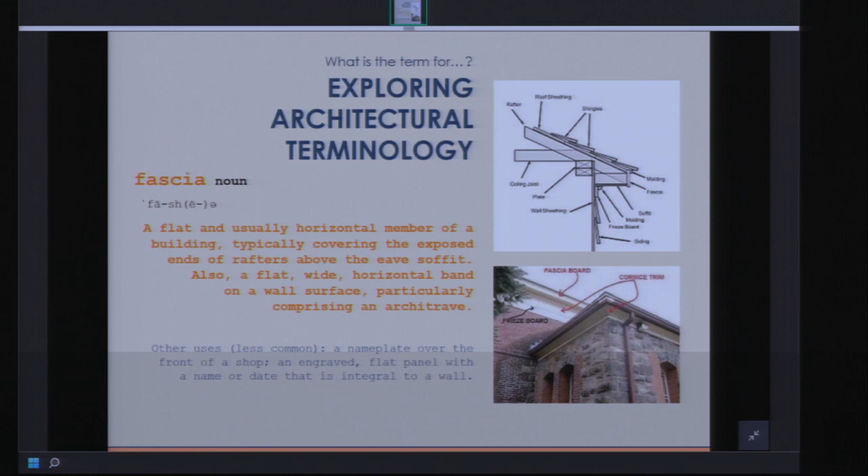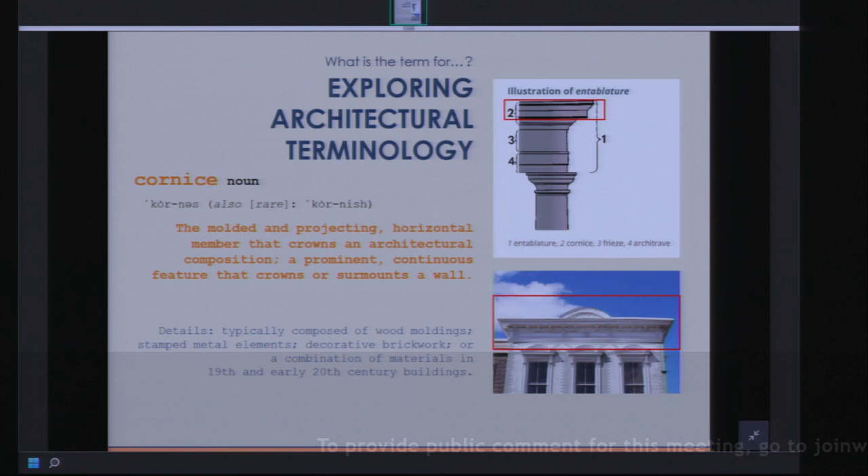Entablature, for those of you who are jumping ahead, is an element found in classical architecture. It's the entire band of horizontal elements above the column capitals or an engaged pilaster. Most frequently we see this in classical architecture, and particularly in Illinois we see it in Greek Revival buildings. The broad, simple massing of an entablature was easy to recreate with the simple tools that traveled easily with pioneer carpenters.

Batter. A batter is the slight slope inward toward the top of a wall, pier, or column face. The slope may be a straight line or a concave curve. Most typically, many people are familiar with this as seeing battered columns or piers in craftsman-style architecture, but you also see battered walls in Egyptian Revival and Moorish architecture, and also as parts of ramparts. Think about prisons or sea fortresses.

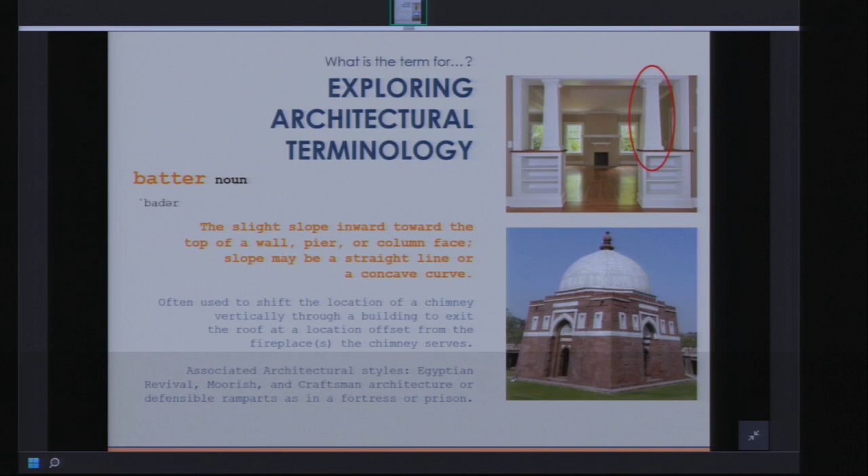Voussoir. A wedge-shaped or tapered stone or brick used to construct an arch. The central voussoir is called a keystone, placed last as a wedge to lock a true arch. Keystone voussoirs are oftentimes larger and sometimes project slightly from the face of the arch. When an arch is composed of brick in authentic historic architecture, the brick is called gauged brick because the brick is actually tapered. Oftentimes in a modern brick arch, masons will use the same size brick of regular dimensions, and they will increase the joint width to get the joint. But in a historic arch, the brick is actually tapered to create gauged brick and create individual voussoirs.

Cartouche. An ornate or ornamental frame, typically scroll-shaped, surrounding a tablet. It also refers to the convex, circular, or oval bas-relief decoration on a wall. It's often associated with classical and Georgian architecture. Its roots are from the Latin charta. Additionally, cartouche may include an inscription, a date, or a name in addition to any bas-relief sculpture. Sometimes you'll see a coat of arms engraved in them as well.

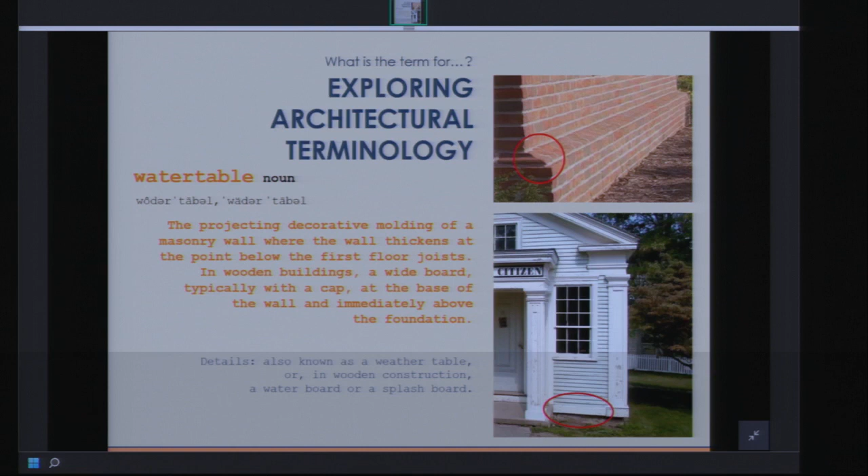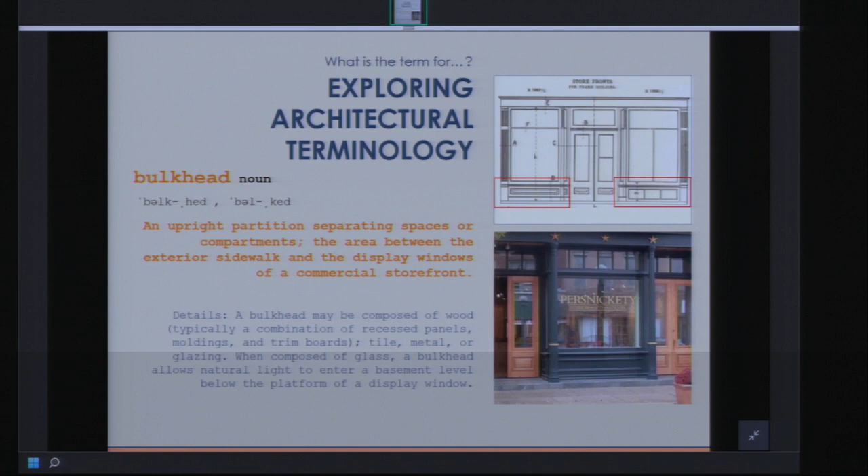Cheek wall. The side wall of an object. In architecture or landscape, it's the flanking walls of a staircase. They also are known as abutments or wing walls, and they can be of coursed stone, carved stone, or brick. Brick cheek walls are typically associated with craftsman bungalows where the walls may flare out and terminate with either a light fixture or a planter urn.

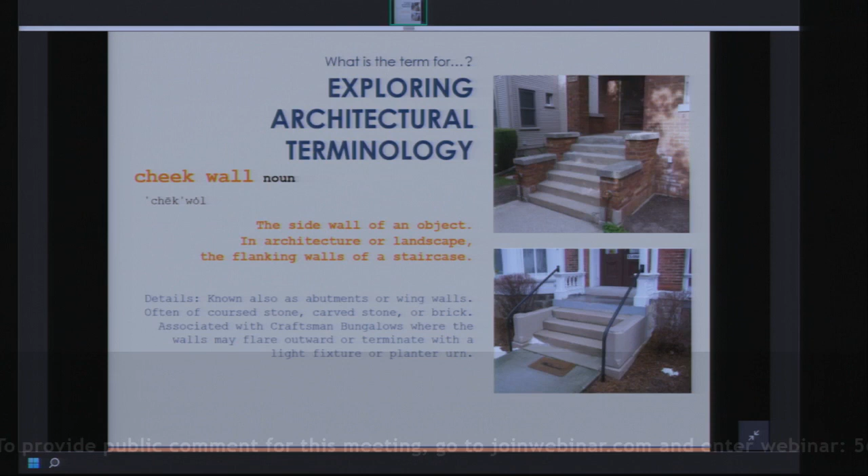Vitrolite is a proprietary term that has become associated with the material itself. It's pigmented structural glass used for a variety of applications, including commercial storefronts and bathrooms. It's associated with the Art Deco style.

It was originally marketed as Sani Onyx for use in commercial refrigeration units in the 1920s. Later, another product was introduced called Carrara glass, and then Vitrolite was introduced. In the mid-1930s, the Libbey-Owens-Ford Company sponsored an architectural competition to encourage architects to find creative ways to use Vitrolite in modernizing storefronts.

Today, Vitrolite and Carrara glass is highly prized in historic districts as a representation of the evolution of historic buildings. It can be salvaged by using hot wire to get behind the glass and cut it off of the mastic. It was introduced in 1900 by a company in Indianapolis, Indiana, and the last company producing this type of glass was in Germany, which ceased production in 2020.

In some restoration projects, they have found that back-painted glass creates almost the same appearance when trying to patch broken glass on a storefront that was finished in Vitrolite.

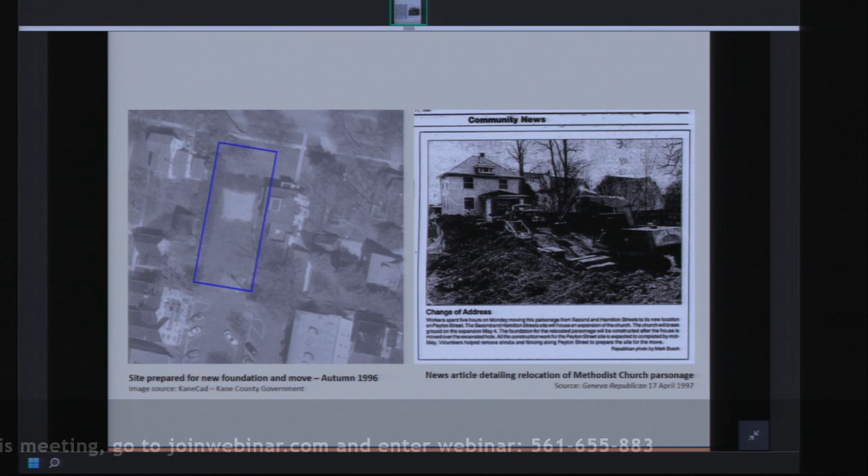Also, there's a newspaper article from April of 1997 discussing and identifying that the building had been moved. So we do have good verification of the building being moved in the spring of 1997.

I want to correct the staff report right off the get-go. In the staff report, I mentioned that the garage was historic, and I was in error. I am thankful that Sean Gallagher, the architect for the project, submitted these images to verify that the garage is a modern construction. I confused this with another nearby property, so I apologize to the commission and the applicants.

So just to run through the images available to look at, before I turn the podium over to the applicants, this is the proposed site plan. As usual, I have tried to identify the various parts of the project by different colors.

The blue section is the original house. The green section above is the historic open porch. The yellow area is the proposed additions, and the pink area is a proposed deck at the rear.

The reason this application is coming before you is that only a small portion of the addition is visible to the public right-of-way, and that's primarily the garage. The rest of the building addition has been tucked behind the original house with the use of offsets so that it does not meet our requirement for review, and the roof line has been held equal or below the existing ridge.

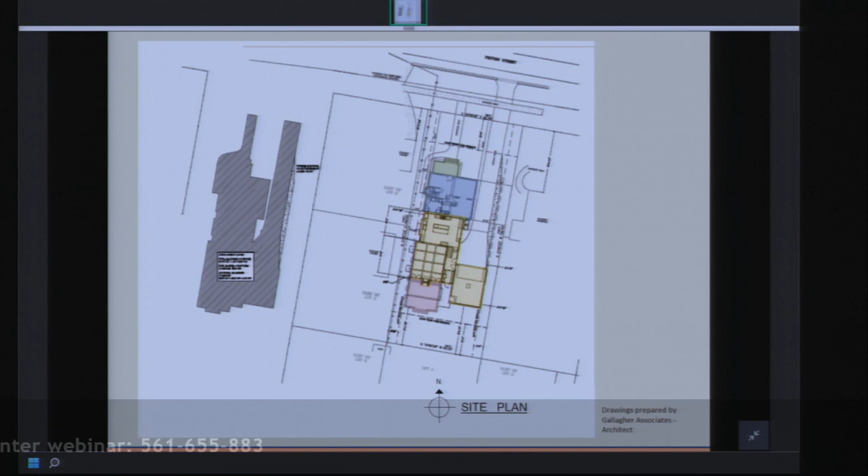Elevations have been provided by the applicant. I'll let them tell you in more detail. Again, they're available for your viewing and questions.

Again, to give you an idea of what's being proposed, the green is the porch, which faces Peyton Street to the north. The blue is the original 1906 house. The orange areas, which appear kind of pinkish on the screen, are the areas being proposed for demolition at this point.

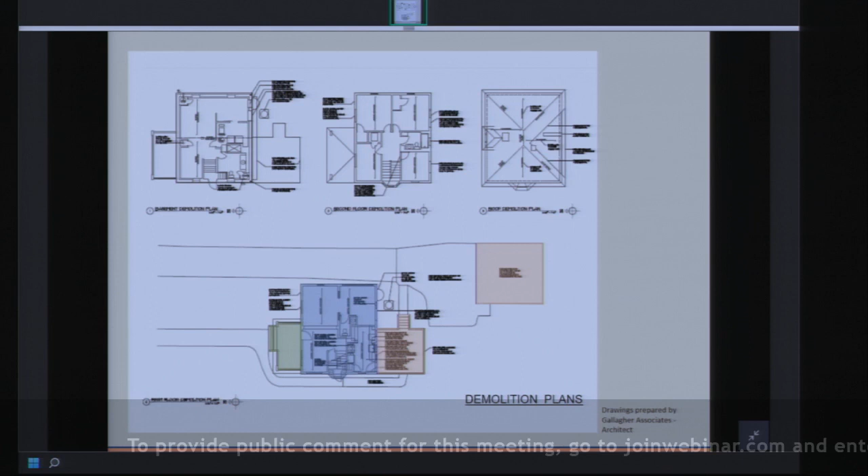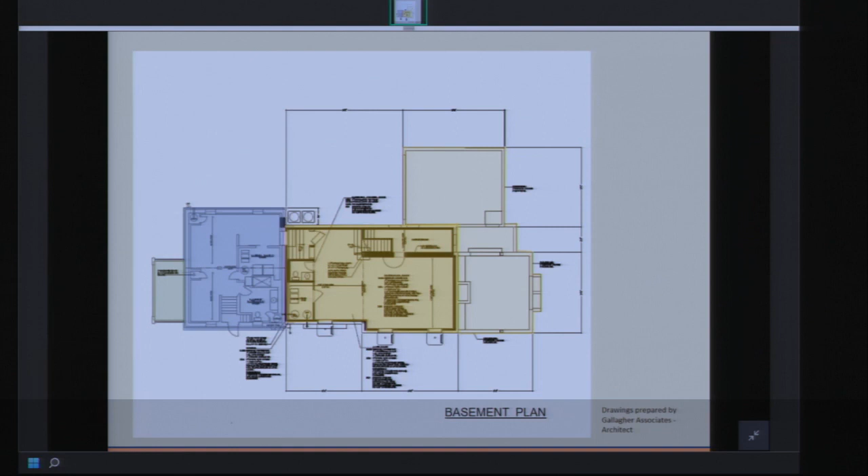At this point, I would turn the podium over to Matt Mayer and his wife Shannon, and they can begin the presentation, then Sean Gallagher, architect, will join them. And I can get you to any slide you want to get to.

Does this need to be turned on? Is it already on? I think it's on. Okay, thank you. You might have to raise it.

Well, thank you for the overview. Thank you very much for your attendance this evening and giving us this opportunity to present our project to you. Also, thank you for your service and being part of this commission. But even greater than that, thank you for the hospitality, and thank you for welcoming us into the community. We haven't been in Geneva for a long time. We just moved in July. And I think we've definitely felt like this is a great community, and we've been welcomed in by new friends and new family that we consider to be part of our own.

And we think that this project is really going to plant some roots for us and for our family. We have 3 children at home, and that's a big part about the project, is just to be able to grow with the house and be able to have our kids grow with the home as well.

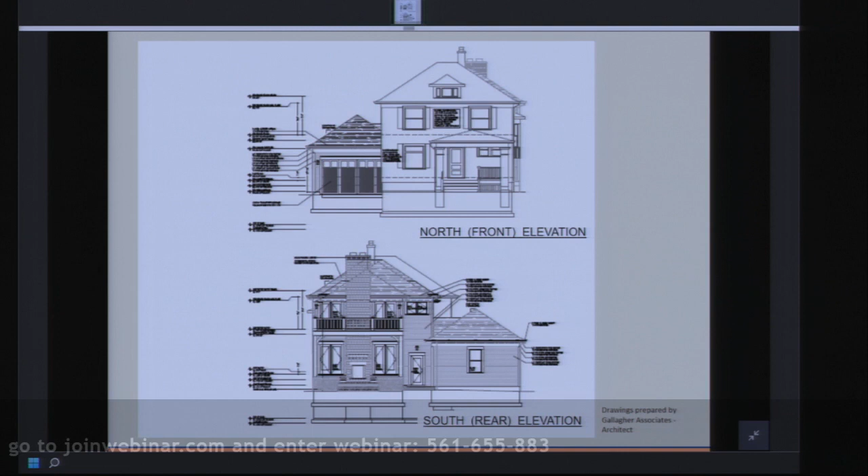As far as siding material, we'll be using smooth LP. Depending on the lap, right now it matches the existing aluminum siding, but we'll see what we have underneath—it'll be exciting.

Question: the exterior siding on the garage in question is going to coordinate with whatever's happening on the house? Exactly—and all of the new addition.

So if the building itself is aluminum sided and who knows what's underneath, when you say the siding on the addition and garage will match what's on the original house, you don't mean you're going to put aluminum siding on that? No, ma'am—that's what's on the original house now, but I do not mean that. What I mean is that when the existing wood siding is exposed, we will be matching that lap. Otherwise, if it turns out it's all Tyvek underneath, Matt and Shannon will have to decide what to do then. But whatever the case, if it's all Tyvek, we'll be coming back to you with a request to use LP smart siding smooth, with a lap appropriate for the style and vintage of the house, and everything will follow that lap. I see, okay, thank you.

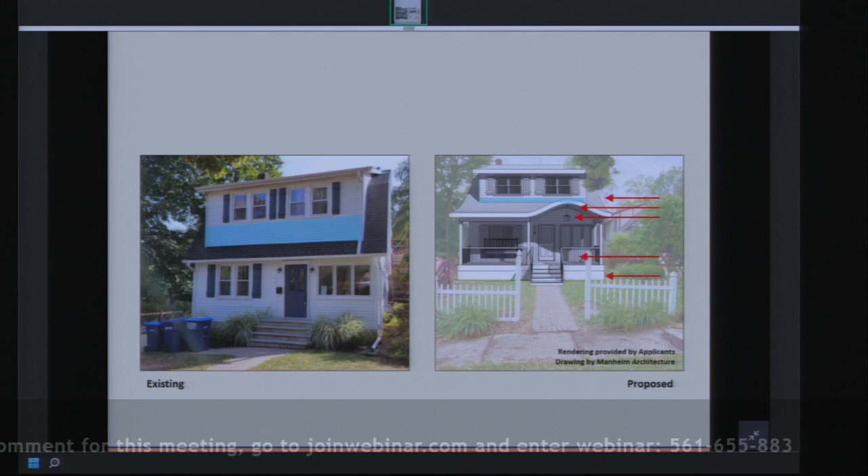The rendering shows a fairly open railing system and a closed apron at the base of the proposed porch.

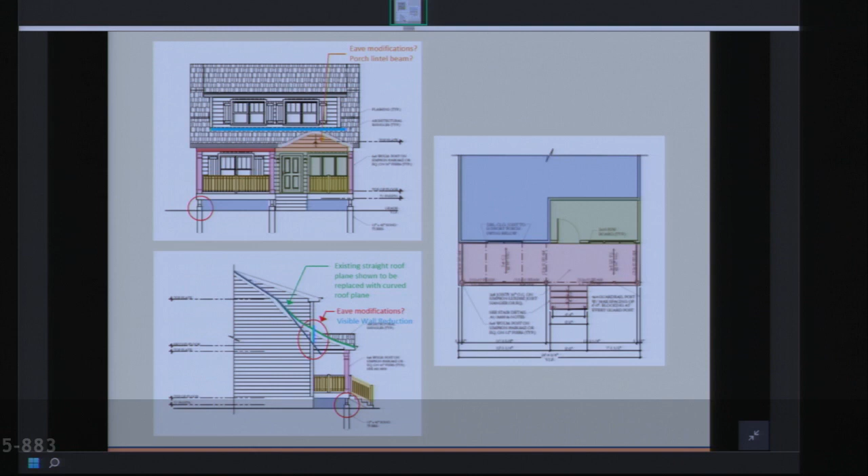Here are the details submitted by the architect, showing the structural connections to the existing historic facade, as well as the details of the balustrade and the deck itself on the right side.

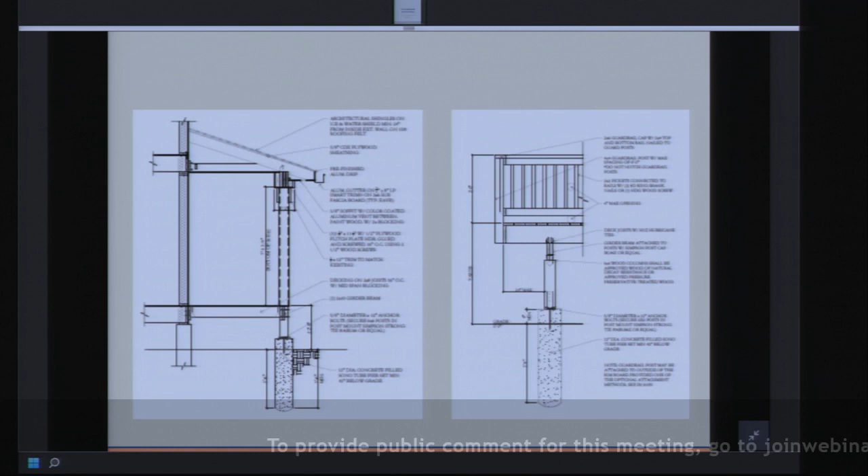With that, I would like to turn the podium over to Jeremy and Melinda Sharp, who are the owners of the property, and their architect, Nicholas Manheim. They've got a presentation, and I can run through it as you tell me to go to the next image. They're the images you provided.

Sounds good. Hey guys, I'm Jeremy Sharp. It's very nice to meet all of you. My wife, Melinda, is—oh, she's coming. So this is my wife, Melinda, and our soon-to-be baby, Isley Gale. Due in November, but we'll see if we get there. The doctors don't think we're gonna make it that far.

So we moved up to the area a few years ago, and it's funny, our realtor actually dropped us off—we saw a couple houses and dropped us off at Graham's Coffee Shop on 3rd Street and just absolutely fell in love with the area. We were in a hurry to move up here. Nothing down here was available, so we bought a house in St. Charles, and the minute something popped up down here that we liked, we nabbed it. We actually found out that she was pregnant the day after we purchased the house, so it seems like a good sign that we're moving here.

We've really enjoyed being here. We walk down to 3rd Street all the time and just really enjoy being outside and in the area, and it's just a really cool spot for us. So, do you have anything to add? Hope that pretty much covers it.

And with the front porch, we're really looking forward to sitting outside with our little girl, watching her grow up, watching everything go by in the city and all the people walking, and being able to get to know everybody. Even though we've been here a few years, there's been COVID, and we haven't gotten a chance to get out and meet a lot of people yet. So we really want to use this as an opportunity to get out and meet people and just be available.

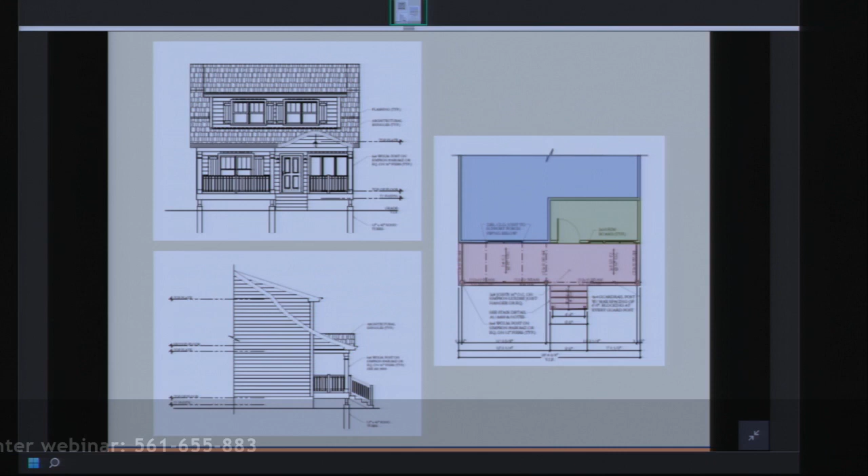Lisa, for what it's worth, the door is off-center, not centered on the house. I know, it's difficult to see on the original black and white picture, but the straight part of the dormer is actually substantially less. You can tell they changed the roof line slightly, I think, when they enclosed that porch in—it was actually slanted up almost to the windows. I feel like there's a visual presence happening between these two, because I can see the opening for the porch there.

It's all very subtle how it was enclosed, but it didn't change the overall facade significantly. Can I see that elevation comparing the existing building with the proposed? I feel like maybe it's a combination of things here, where it's burying some of the Dutch colonial. And like I said, I appreciate what you're trying to do. I'm just concerned that the functional need of having a front porch may be superseding the fact that this is a home in the historic district—a Dutch colonial home—and we have a responsibility to protect how that house looks.

And some of those features. I would agree with what Lisa is saying. As you showed us all sorts of photographs, I have a feeling that this house is smaller and perhaps does not have as much architectural detail as some of those other houses. Perhaps this was a simpler Dutch colonial than some of the other houses you showed us, which appeared to me to be more elaborate.

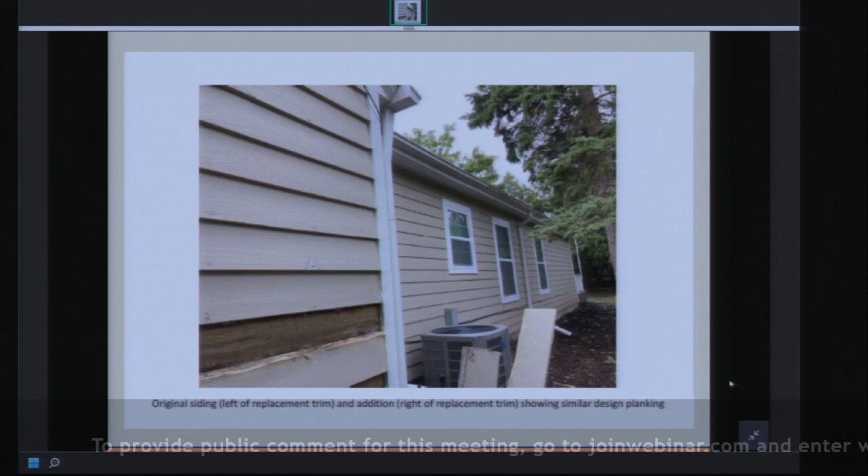And you can start to see some of the issues with the siding itself. You'll see in a lot of the photographs submitted by the applicant that their contractor has circled in blue. So on the second board up from where the board's missing, you can see one of the elements circled in blue to indicate the extent of the damage of the existing siding.

These are all owner-submitted images that identify various things. I will let them go through and describe them, but I will say that I did visit with Scott and Carrie Drumheller at the site on September 21st and did witness the damage and the issues they've highlighted as not just being isolated examples, but widespread across the elevations of the house.

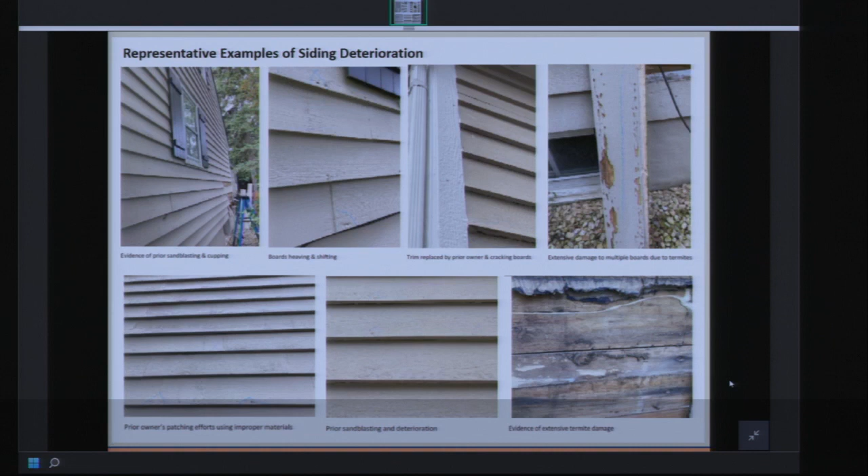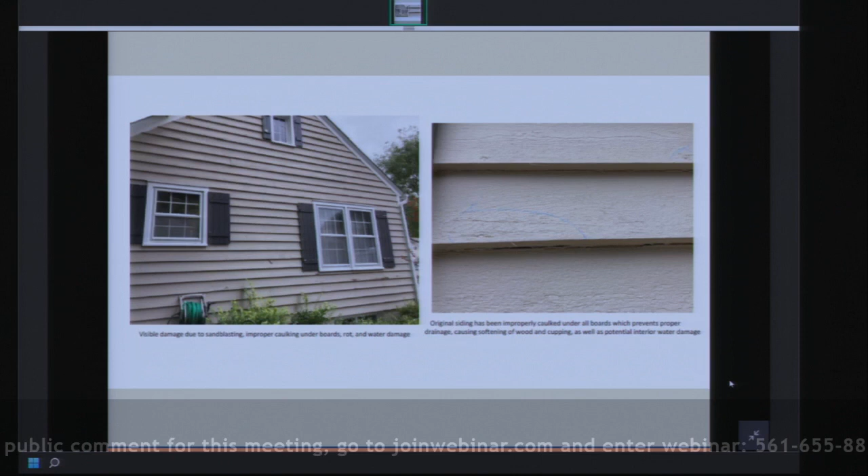So again, you can look at the south side, which is on the left image, and you can see it's been sandblasted. You can also see areas where there's dark spots and some of the blue circles to show the extent of the damage caused by earlier sandblasting, which opened up the wood.

There's also areas where it's rotting from the underside, and at some point a painter had caulked underneath each joint of the siding, which only further exacerbated trapping water and insect infestation, which is one of the reasons this is coming about.

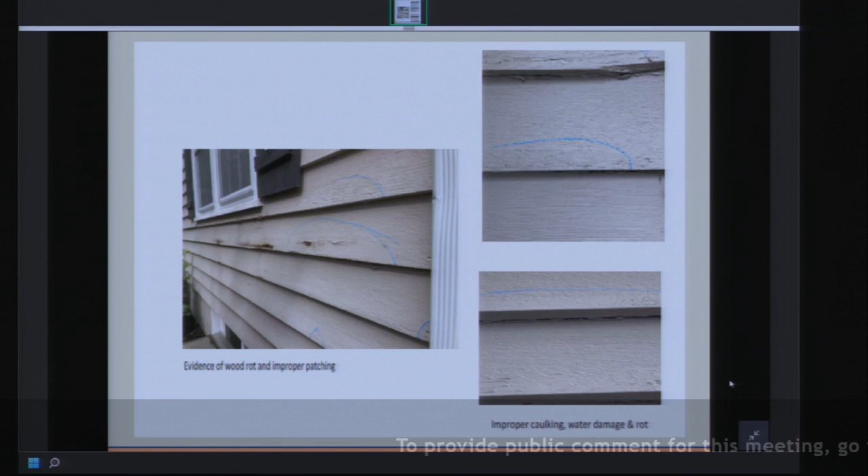As I mentioned in the staff report, I'm sure Mr. and Mrs. Drumheller will identify that they have been dealing with an infestation of carpenter ants and termites, discovered shortly after they purchased the home. They've had that eradicated, but the termites have done quite a number on the siding itself.

So the Drumhellers have provided a breakdown of costs like we require when a siding replacement request is made. They have included the elements the commission has requested to see: materials, including the removal of the historic material, the installation costs, finishing costs, and even the costs associated with the disposal of those materials.

They have also provided as an example 201 North 3rd Street, which was referenced earlier this evening. This was the GM Poley residence where, if you recall, those of you on the commission at the time, the siding was determined to be beyond salvage and was replaced.

I do have attached to my presentation tonight, if anybody needs to revisit that case to see why that siding was allowed—I do have that attached, but I don't want to put that before I let the Drumhellers make their presentation. So at this point, I would invite Scott and Carrie Drumheller to the lectern, and I can go through any of the images as frequently or infrequently as you wish.

Thank you very much, Commissioners and Mr. Lambert. I'm Scott Drumheller. This is my wife, Carrie.

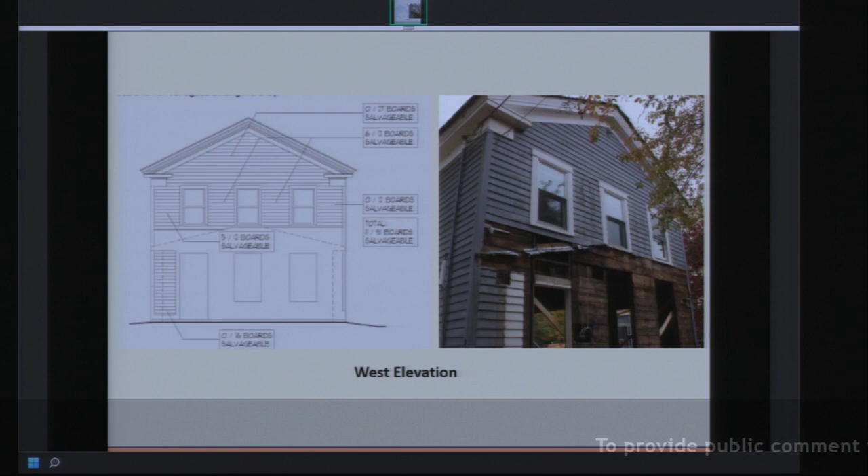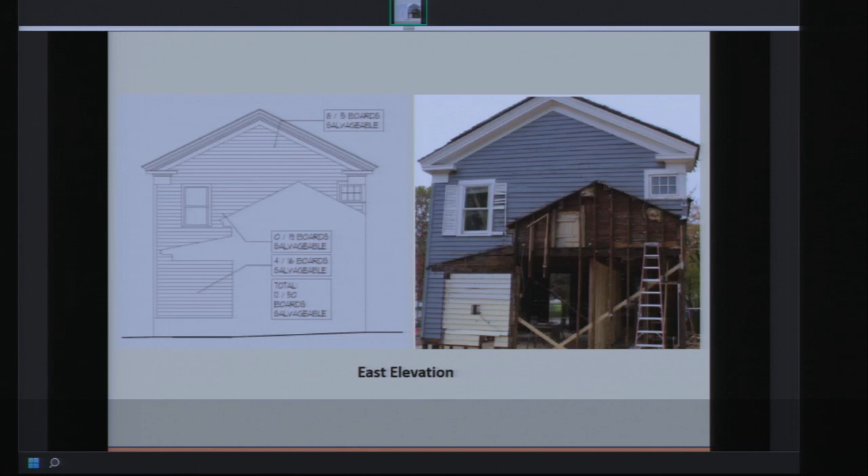On the front, a porch had been put on at some point and had altered some of the material, and the rear addition was also not salvageable. The service wing was not salvageable either — it had been remodeled and had some unfortunate structural events occur in it. So the siding that was left was inventoried, and it was found that only a small minority did not have splitting, checking, cupping, or rot — and that was the case all the way around the exterior.

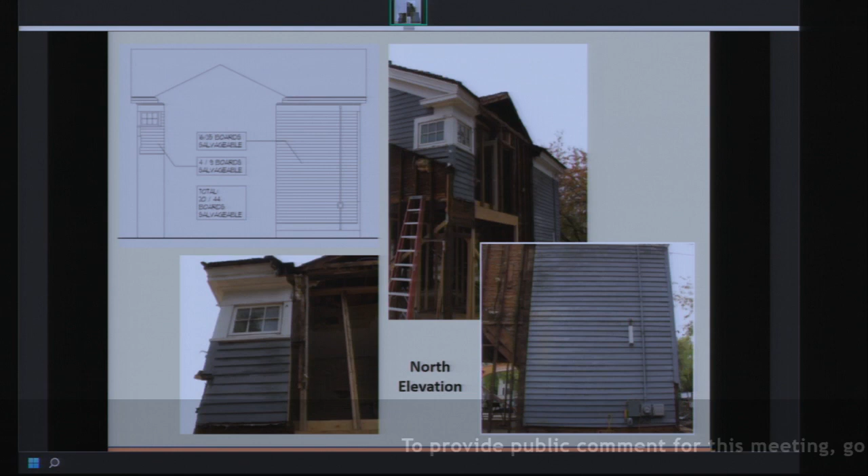In this particular case, the architect went above and beyond and did an actual board-by-board count. This was a tax assessment freeze project, and the state was also requiring justification. I think that's one reason Sean Gallagher did the board-by-board assessment — to not only make the case to the local commission, but also to the State Preservation Office, for why the siding could not be salvaged.

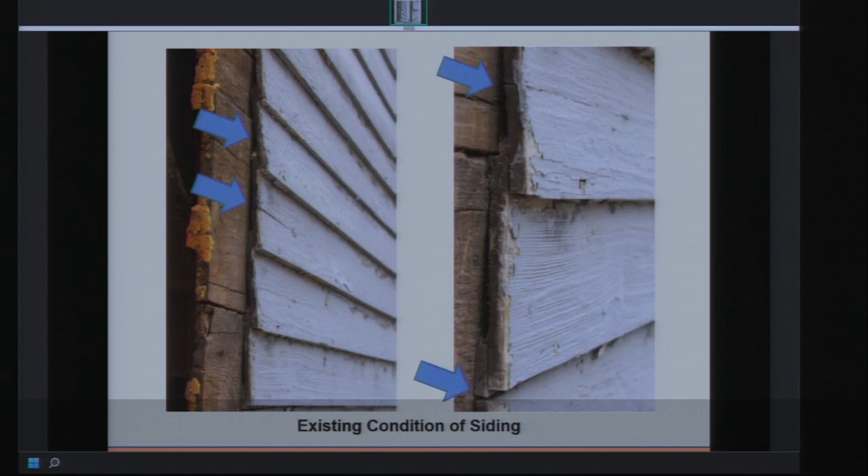So that's kind of a quick overview. If you have specific questions, I can go into greater detail, but it's a very similar case where the house had both poor maintenance, sandblasting, insect infestation, and similar issues checking, and boards that had nails that had their galvanized coating knocked off, had rusted, and created the holes to enlarge as the nails expanded as they rusted.

A lot of the same issues with this house exist in the Drumheller house as well. In that previous case, what was the siding solution in the remodel? The commission ultimately approved the replacement of all the siding with cementitious siding. It was all replaced except for the historic trim and entablature and frieze boards. It was debated quite a bit as to whether that was the appropriate thing in the end result. Looking at all the SOI standards and the actual condition, that was the determination the commission came to on this case.

The state did concur. You were out at the site and did probably a harder look at this. Significant damage to over 95% of the wood siding—do you agree with that statement? I do agree. I did not take a board-by-board count, but when I did look at it, virtually every board on the north and south side had some level of damage. The east side had a little bit less, but it was widespread over the entire elevation. It wasn't concentrated on one area over another—it was widespread across all three elevations.